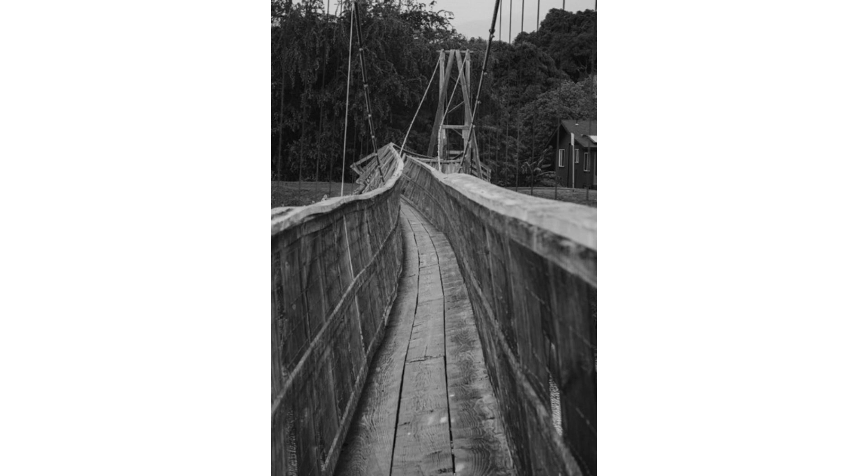In applied mechanics, the strength of a material is its ability to withstand an applied load without failure or plastic deformation. Therefore, the field of strength of materials deals with forces and deformations that result from their acting on a material. A load applied to a mechanical member will induce internal forces within the member called stresses when those forces are expressed on a unit basis. The stresses acting on the material cause deformation of the material in various manners, including breaking them completely. Deformation of the material is called strain when those deformations too are placed on a unit basis.

The stresses and strains that develop within a mechanical member must be calculated in order to assess the load capacity of that member. This requires a complete description of the geometry of the member, its constraints, the loads applied to the member and the properties of the material of which the member is composed. Let's introduce some fundamental concepts then, such as stress, strain and the factor of safety in the context of elastic behavior of engineering materials in tension.

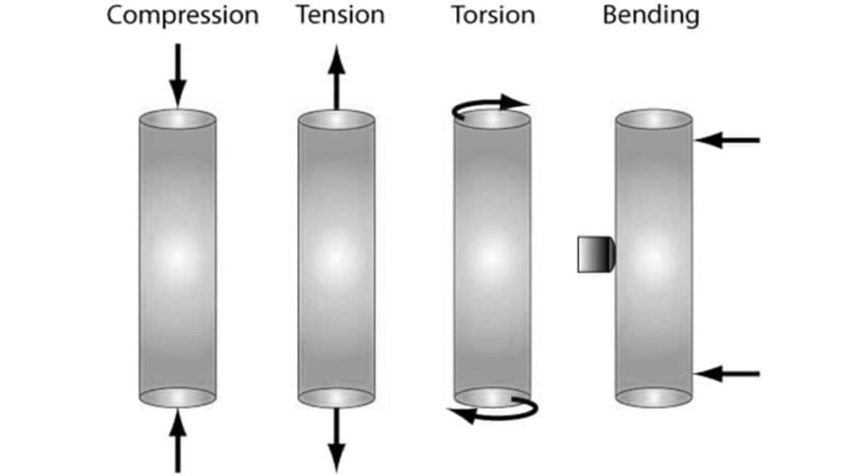Tensile strength. As we said, strength is the ability of the material to withstand applied force without failure. As such, strength is one of the most important mechanical properties of engineering materials. Strength varies, depending on the nature of the load applied to the material, and we often have to distinguish between tensile, compressive and shear strengths of a particular material. The tensile strength of a material is determined by the tension test, which consists of the gradual application of an axial tensile force until fracture occurs. Typically, the testing involves taking a small sample with a fixed cross-sectional area, and then pulling it with a tensometer at a constant strain rate until the sample breaks.

Much engineering design is based on this measure of tensile strength, known as ultimate tensile strength, UTS, which is defined as the ratio of the maximum tensile force applied before fracture occurs to the initial cross-sectional area of the test specimen. Tensile strength plays a crucial role in engineering applications as it helps determine the suitability and reliability of materials for specific tasks. Engineers rely on tensile strength data to ensure that structures, components, and materials can withstand expected loads and forces without failure. By understanding the tensile strength of different materials, engineers can make informed decisions during the design and manufacturing processes. Typical average values of ultimate tensile strengths are 470 N/mm² for mild steel, 150 for aluminum and 70 N/mm² for nylon.

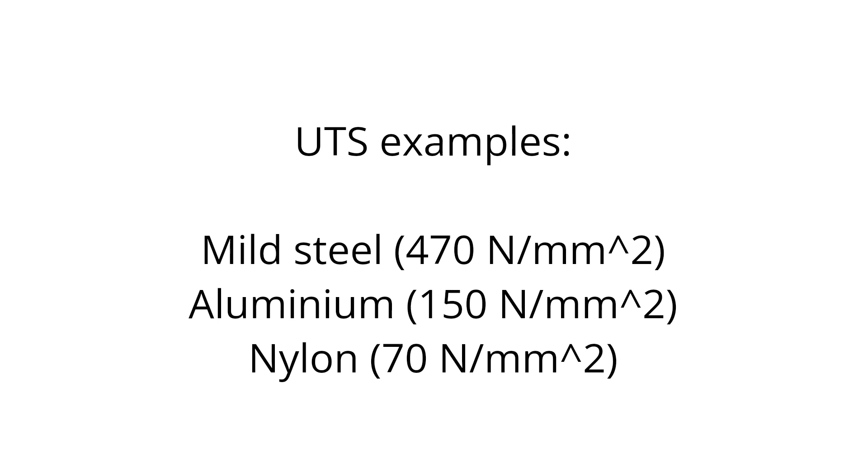Tensile strength is a critical property in numerous industries and applications. In structural engineering, it ensures the safety and stability of buildings, bridges, and other infrastructure. In the automotive industry, tensile strength is essential for manufacturing reliable and crash-resistant components. Moreover, it is vital in aerospace, manufacturing, construction, and even everyday consumer products, such as ropes, wires, and textiles.

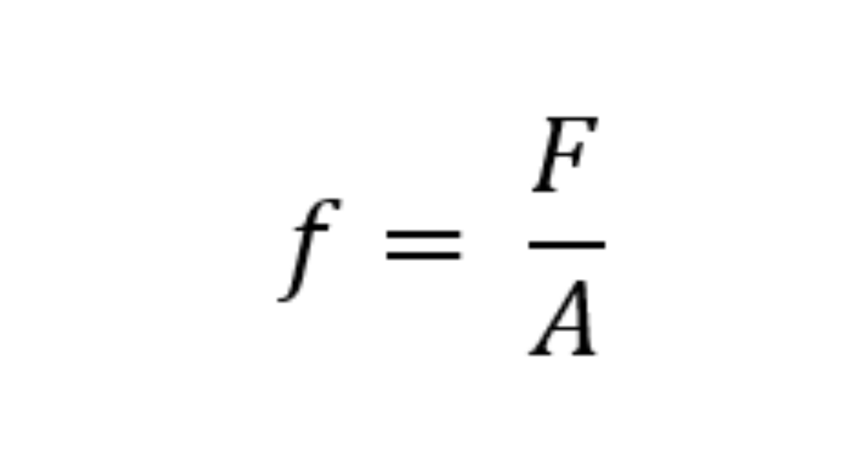Direct axial stress in tension. If we consider the behaviors of materials under loads which do not cause rupture, crushing or any form of permanent damage or deformation, we must learn how to calculate the allowable load on a structure or a component which will ensure a sufficient degree of safety. It is what we call direct stress, which is the intensity of force distribution over the cross-sectional area of the material subjected to direct load, and defined as. The international system unit of stress is the Pascal, with the symbol Pa. The definition of the Pascal follows from the definition of stress, which is force per unit area, or equally, Newton per square meter.

Factor of safety. It is interesting to compare the result of the stress with the ultimate tensile strength of the material. For example, let's consider we have a bar of mild steel subjected to a tensile force of 20 kilonewtons. By applying the formulae, it will give us a stress of around 100 megapascals, which is far below the 500 megapascals the mild steel has as UTS. Obviously, the stress is not sufficient to rupture the material of the bar, and therefore, the bar is safe under the applied load, but, how safe?

If we compare the UTS and the actual stress in the material of the bar as a ratio, it is. This ratio is an indication of the degree of safety considering the fact that the actual working stress in the material is considerably below the ultimate tensile strength. Thus we say that the factor of safety in our example is equal to 5. Therefore, one definition of the factor of safety, Fs, is the ratio of the ultimate tensile strength to the actual working stress in the material. The higher the factor of safety, the safer the product or structure is. A factor of safety of 1 indicates that a structure or component will fail immediately when the design load is reached and will not be capable of supporting any extra load.

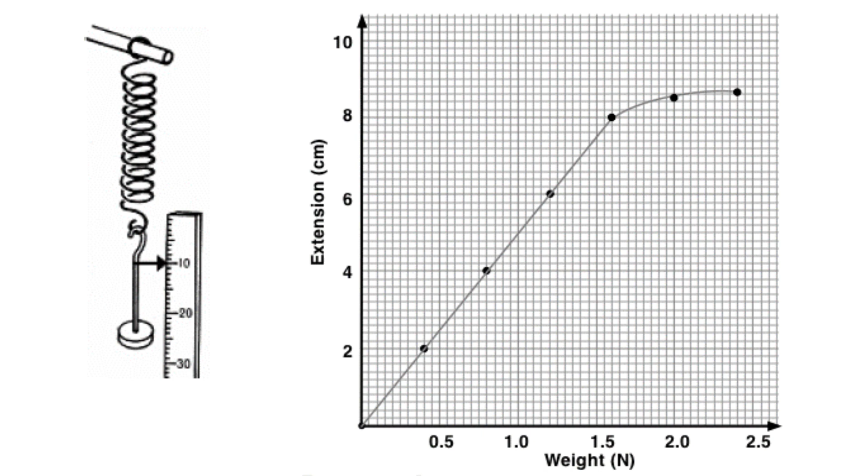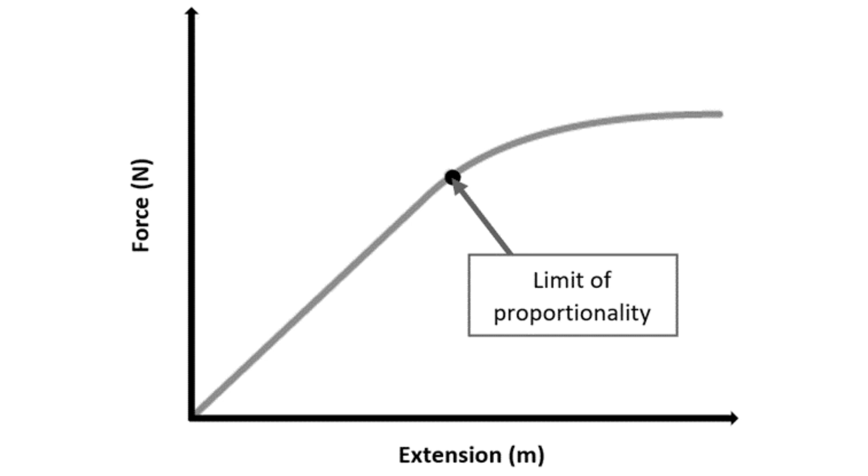The property of stiffness is closely related to the elastic and plastic behavior of materials. It is found that up to a certain point, known as the elastic limit, the material can be stretched without taking up any permanent deformation. It can be said that within the elastic limit, the material possesses the property of elasticity, or the ability to return to its original size after the force has been removed.

If, after the material is stretched to its elastic limit, the force continues to increase, the material ceases to be elastic and displays plasticity, which means it will suffer permanent deformation until eventually rupture occurs at what we already know to be the ultimate stress. A further observation reveals that there is another limit, known as the limit of proportionality, within which the elongation produced by a tensile force is directly proportional to the force.

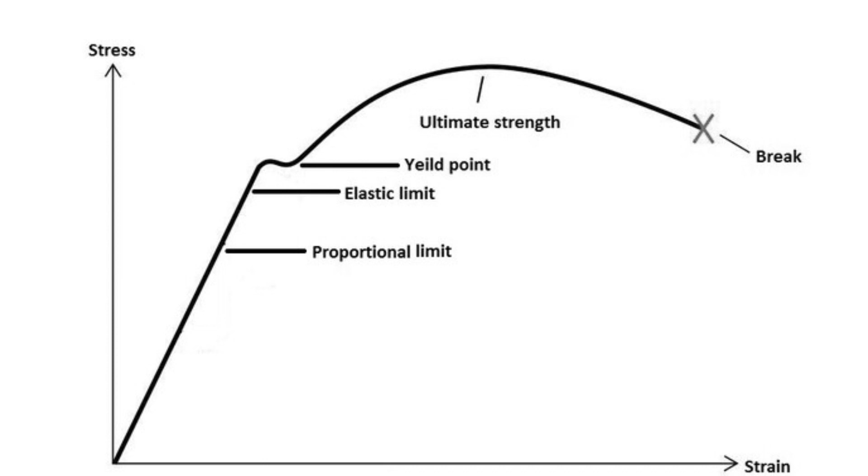The concept of proportionality between load and elongation of elastic materials dates from 1676 by the famous English physicist Robert Hooke. He first stated the law as a Latin anagram. He published the solution of his anagram in 1678 as ut tensio, sic vis, meaning as the extension, so the force, or the extension is proportional to the force.

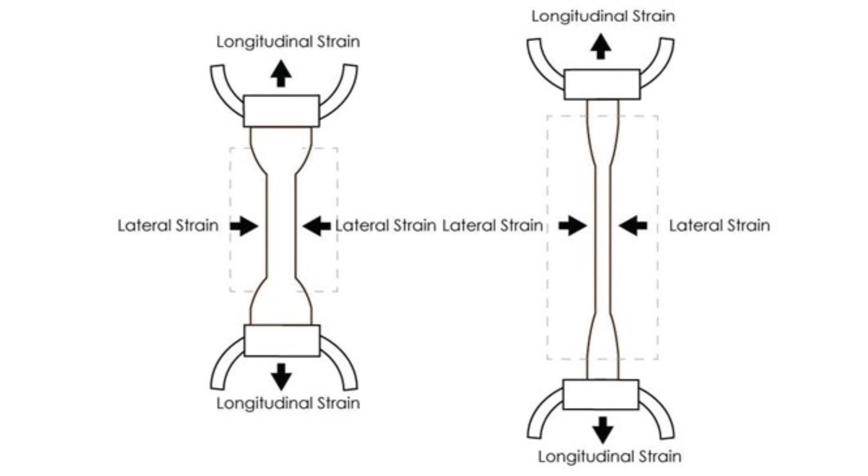In its original form, Hooke's law simply stated that for a bar of elastic material of uniform cross-section, subjected to a progressively increasing tensile load, the elongation is directly proportional to the deforming force. The mathematical equation expressing Hooke's law is: the constant E, relating the stress and strain, is a measure of a material's ability to resist stretching, within the limit of proportionality, and is sometimes appropriately described as the modulus of stiffness.

The stiffness of a structure is of principal importance in many engineering applications, so the modulus of elasticity is often one of the primary properties considered when selecting a material. A high modulus of elasticity is sought when deflection is undesirable, while a low modulus of elasticity is required when flexibility is needed. Another application of stiffness finds itself in skin biology.

The skin maintains its structure due to its intrinsic tension, contributed to by collagen, an extracellular protein that accounts for approximately 75% of its dry weight. The pliability of skin is a parameter of interest that represents its firmness and extensibility, encompassing characteristics such as elasticity, stiffness, and adherence. These factors are of functional significance to patients. This is of significance to patients with traumatic injuries to the skin, whereby the pliability can be reduced due to the formation and replacement of healthy skin tissue by a pathological scar.

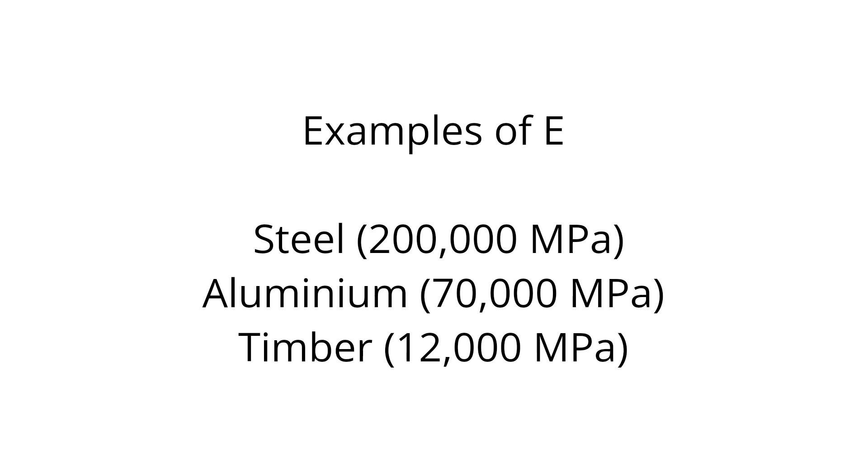The modulus of elasticity can be determined experimentally. Typical values for common engineering materials are 200,000 megapascals for steel, 70,000 for aluminum, or 12,000 megapascals for timber. Let's apply these concepts to solve engineering problems.